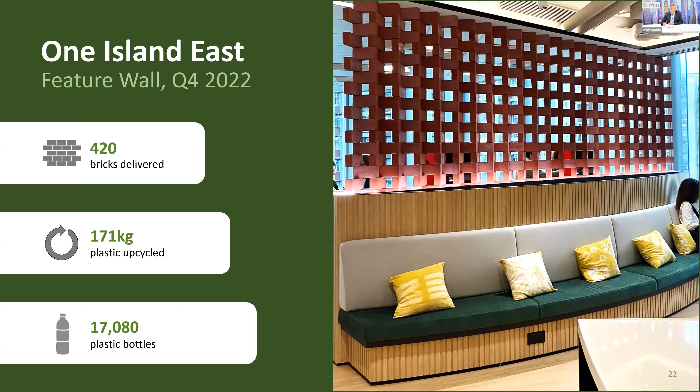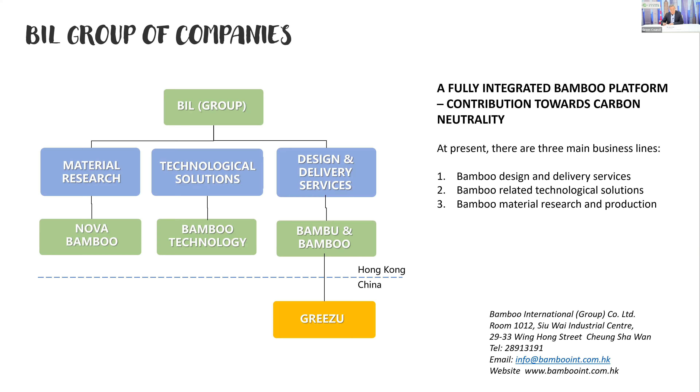So coming to my presentation today. The background is, historically, we all know that there has not been sufficient attention on embodied carbon. We have been looking at the operation carbon for all the years, the green buildings and whatnot. However, given the accelerating climate crisis and the increasing trend of embodied carbon as a percentage of total carbon content, it's now recognized globally the urgency to tackle embodied carbon.

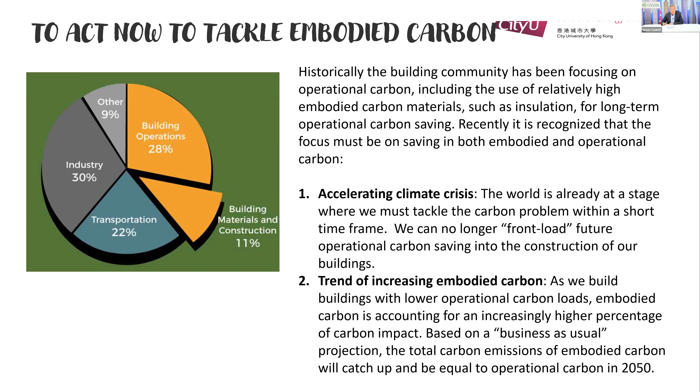China has set a clear direction going forward in tackling embodied carbon. They have new policy directives almost to mandate the procurement of low embodied carbon building materials. And in particular, China has identified bamboo as the mainstay in the reduction of embodied carbon. There's a new policy direction issued in 2021 to promote bamboo industries in China. But if we look at Hong Kong, at the Hong Kong Climate Action Plan 2050, embodied carbon, I believe, is not even mentioned. So I think we need to wake up.

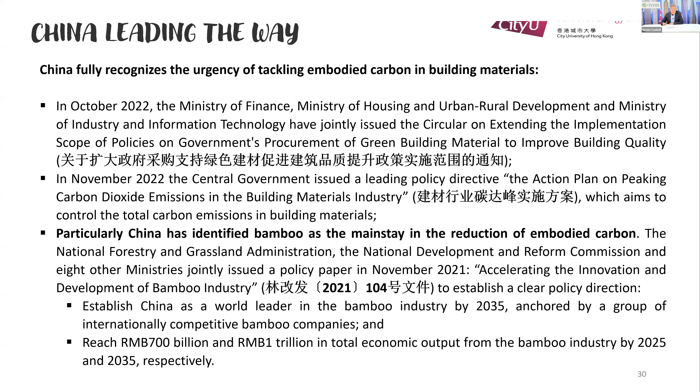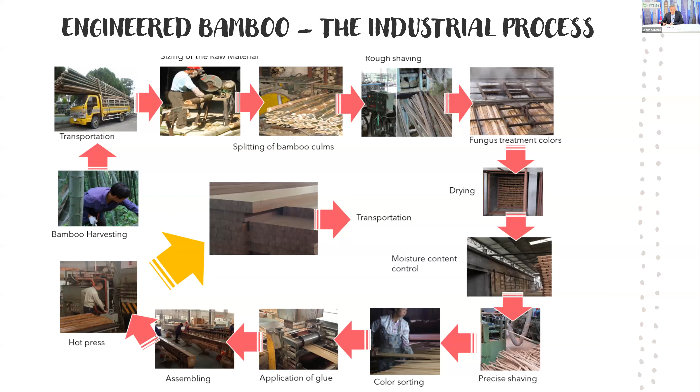Engineered bamboo. We all know the environmental sustainability of bamboo as a natural material, one of the most efficient carbon sinks. Engineered bamboo is an industrial product made from natural bamboo raw material. It's actually quite a simple industrial process. Bamboo may not be a known quantity in Hong Kong, but actually it has been popular in the US and Europe. When you look at all the numbers, the physical properties of bamboo are comparable, if not stronger, than most timber that we are using in buildings.

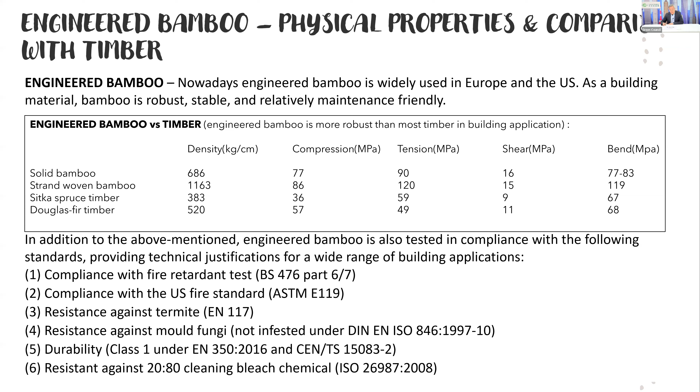And in addition, engineered bamboo is tested in compliance with a whole range of standards, proving its durability and its application in a wide range of applications in buildings. So there's every reason that we could look at it as a viable building material to be used in our city. Based on our experience in BIL, bamboo has a really wide range of applications, from building interiors and large scale structures to small consumer products. It's very versatile.

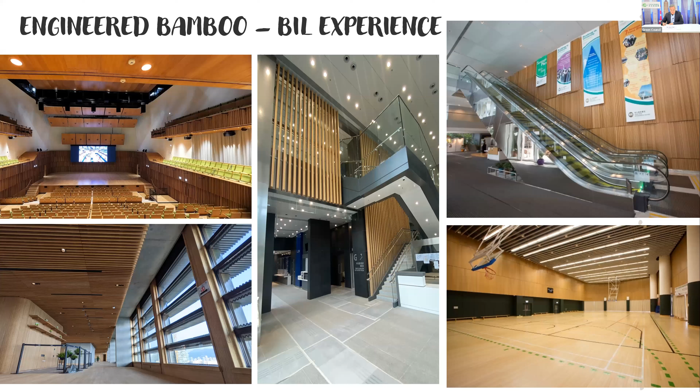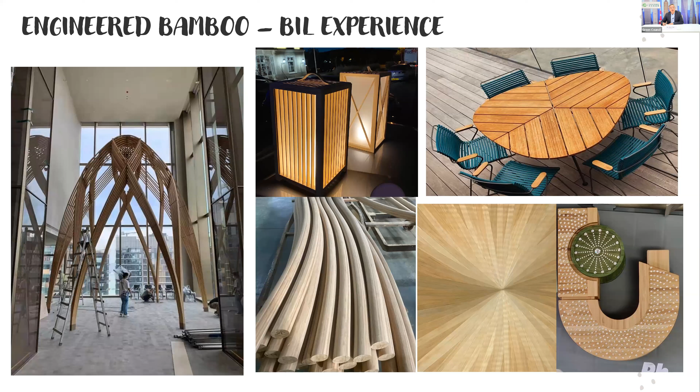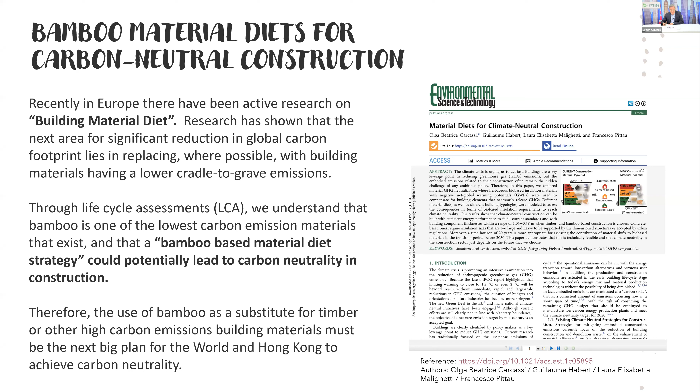But sadly, in our business, only a small percentage will be in Hong Kong. Mostly the products are exported to the US and Europe. And now we come to the contribution of bamboo towards carbon net zero. The carbon mitigation benefit of engineered bamboo is fully recognized. The notion of a bamboo material diet is becoming popular in Europe, and it's believed to be able to help deliver carbon neutral construction. Based on LCA, we can see that engineered bamboo as a building material has the lowest embodied carbon compared with most other commonly used building materials.

And there has been a study suggesting that engineered bamboo can actually help contribute towards carbon neutrality in construction.

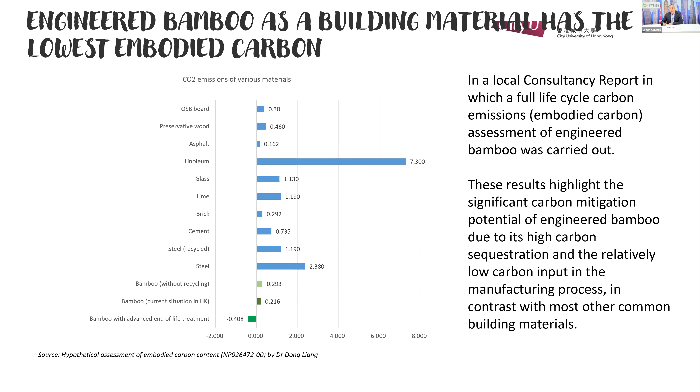We have actually engaged a professor in the City University of Hong Kong to conduct a study. We always talk about the carbon mitigation benefit of bamboo, but we try to quantify. So what could be the actual potential if we apply bamboo in Hong Kong? What could be the actual benefit in terms of carbon content? We look at a hypothetical scenario where we replace the entire wood stock in Hong Kong by engineering bamboo, and we look at the carbon mitigation as a result.

Now in Hong Kong, we don't really have any recycling industry. So basically the bamboo after use would just go into landfill site. So even in this scenario, the carbon saving is actually quite meaningful. It represents about 6% of the total carbon content of Hong Kong in 2020.

Now, if Hong Kong develops its own recycling industry, if we have the same end-of-life treatment to bamboo and other biomass in Hong Kong, similar to Europe or Japan, the saving is really substantial. It could be up to 28% of the total CO2 content in Hong Kong in 2020. So the numbers don't lie. So I think this gives us a very good direct feel of how bamboo can benefit carbon neutrality.

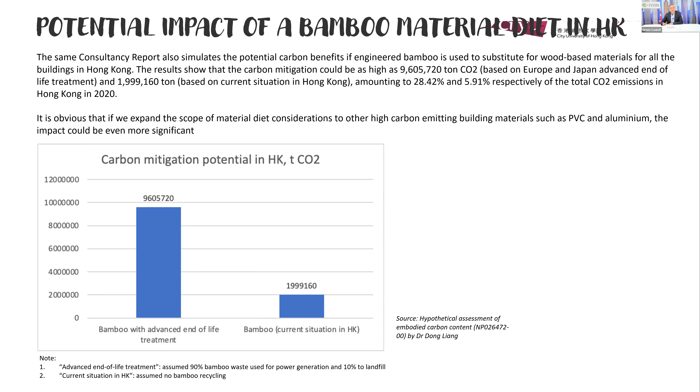In Hong Kong, actually we have briefed with other speakers before I speak. Promoting bamboo in Hong Kong is very, very difficult. There are few reasons for that. One is, I would say, the business as usual and the risk-averse mindset. Despite bamboo having been popular and proven to be a robust building material in other parts of the world, locally here, we just want to stick to our proven formula.

And in terms of regulatory framework, we don't really have any regulatory framework for submission of any bamboo design. And one of the key barriers, I would say, in Hong Kong is the fire regulatory compliance. Now, this is a very, very odd situation. Bamboo and wood as biomass building materials are popular in the US and Europe. So people over there are convinced that the fire risk of bamboo or wood is manageable. So what are the reasons that we think it is not manageable in Hong Kong?

So it's a very good question that I think we should ask, and then we should look at and see the actual reason why. Is it just that we do not want to spend time to take the risk and look at it, or is there other technical justification?

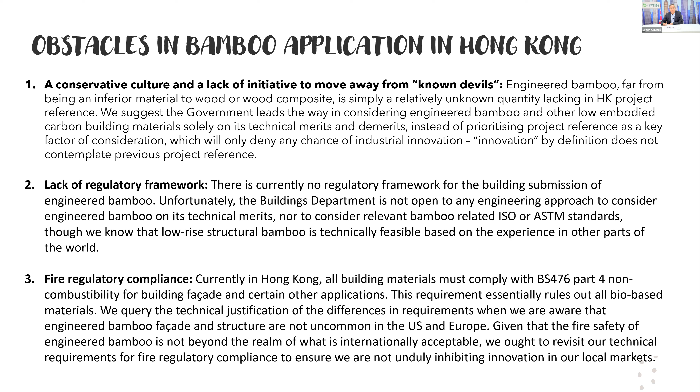The following is my proposed way forward. One is I would encourage more bamboo plantation in Hong Kong. Hong Kong, being part of South China, in terms of climate is quite suitable for bamboo plantation. And I have checked with the local regulation, since bamboo is a grass, there isn't any regulatory barrier if we want to plant bamboo in Hong Kong. And bamboo plantation is low maintenance.

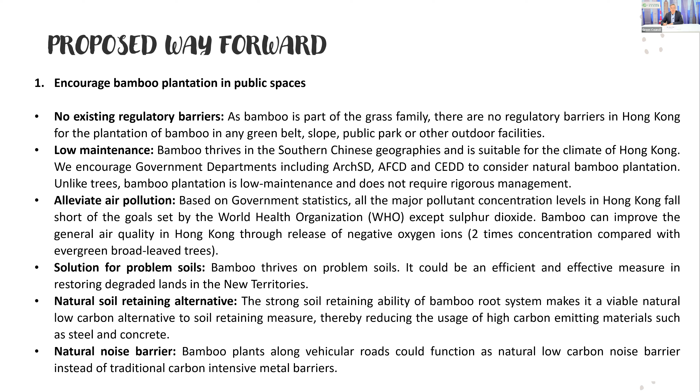It can alleviate air pollution. It can solve problem soils because of the robust root system. It can actually restore degraded soils and lands. And because of the very robust and strong root system of bamboo, it is a very good natural soil retaining alternative. Of course, it can be a noise barrier as we have looked at.

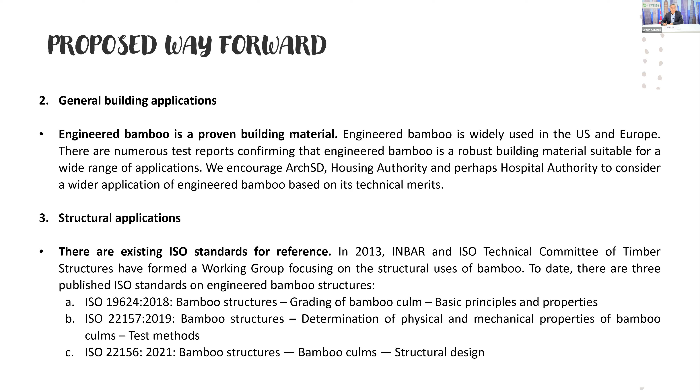In terms of regulation, there have been existing ISO standards that regulate the application of bamboo in a structural situation. And in 2022, last year, ISO published a new standard to regulate the application of engineering bamboo in structure. So I think there is enough international experience and international standards that we can make reference to.

And I would encourage the Hong Kong government under the new administration to really have an open mindset to embrace and look at the possibility that we can have the alternative of using bamboo in Hong Kong on a much bigger scale. And in terms of fire compliance, as I mentioned just now, there are standards in the US, ASTM standards, which regulate the use of wood and bamboo biomass-based construction material in a fire situation. And there's no reason to believe that the people over there have lesser concern on the fire hazard of any building material than in Hong Kong.

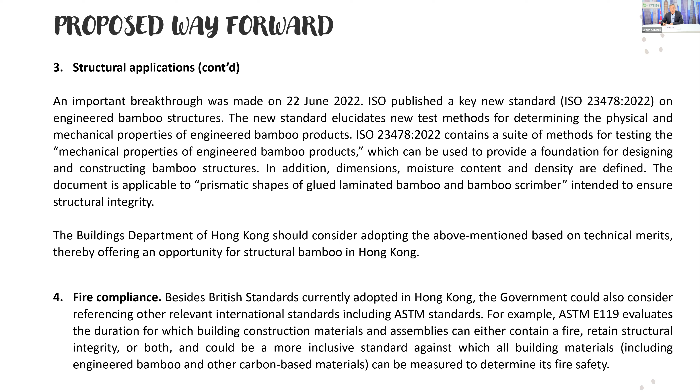So I really urge the government to take a more open and embracing attitude towards this new, actually not a new, building material. And I will come to this point, which is the innovation on bamboo material.

As I said when I opened the presentation, our company is working with the City University of Hong Kong to research a new engineering bamboo material. We received an international award in 2021. It is proven to be one of the most innovative bamboo materials that we have seen.

When we look at the industrialized process of bamboo in the past, it has mostly been on the manufacturing process. There isn't really any research on the material itself, but we know that globally in other universities, people are starting to turn their attention to explore how to enhance the material itself, to see how we can reinvent the material in a way that would make it stronger, more durable, better, and have better application in buildings and other situations. And hopefully we can deliver the product to the market within this year.

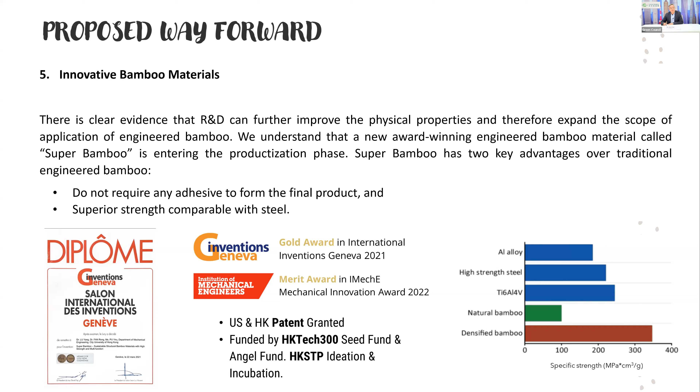So in conclusion, I think we should act fast and act now. The problem of embodied carbon is becoming serious, as we are all aware.

And I think to start, as a starter, the Hong Kong government should include tackling embodied carbon in a big way in their Hong Kong Climate Action Plan 2050. I think that hopefully it could lead the way to try to create momentum in Hong Kong to really look at bamboo and other low embodied carbon building material that can help us to achieve our target of carbon neutrality in 2050. And as I just mentioned, engineering bamboo by itself is not a new material, it's proven. It's just a matter of whether we want to consider the application in Hong Kong.

And regulations, international standards, all the tools are here. It's a matter of whether we really want to use it. And I think that's about my presentation today.

So I have quite a lot of experience. The architects may want to use bamboo because they see the benefit of using it, and they do not see any issues. But the barrier comes from the facility management or property management people, because they haven't had any experience. They don't want to try. And when you try to present to them all the test reports, standards and whatnot, and point to previous experience in Hong Kong or somewhere else, they are not ready to engage. I think it's more the mindset.

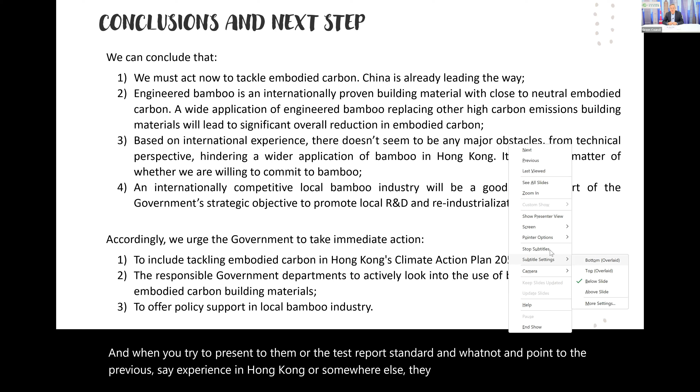I think we need some momentum. I would say we need some drive from the government to create the momentum. Because we're talking about carbon net zero in 2050, if the government imposed requirements in any building submission that the building as a whole has to achieve a certain embodied carbon content, that would make people really seriously look at eco bricks, bamboo, low embodied carbon cement, and all similar low carbon building materials.

Yeah. I think that always, when you try to change the momentum and the culture of society, there needs to be something really strong to make the move. And the government, I believe, should be the entity to create the momentum to move forward.